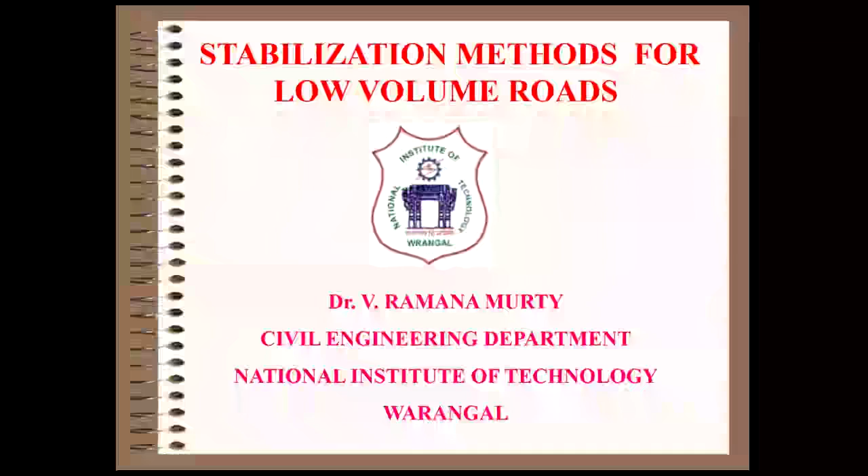This helps an engineer understand how we can handle different types of soils encountered in our engineering practice, especially for road construction. The fundamental principles of soil understanding, scientifically, were put forth by Terzaghi. This soul was selected by nature to emerge a new branch of science in civil engineering, soil mechanics. He has given all the scientific background of how to see the soil.

It is not like a lump of some mass. There is science within. What is that science? We have to see, otherwise our understanding cannot be complete. It is not only life science, but also professional science here within the ground, because Mother Earth not only serves as a mother to serve us, but also supports us by all means.

That support, while it is offering, as engineers we have to understand, so that we can comfortably transmit the loads to Mother Earth. Then only Mother will be happy, we will be happy. If there is any excess stress, then distress starts. That distress ultimately comes to the surface of the pavement, and ultimately we suffer. That is how fundamentally this understanding is essential to make our systems promising.

So let us have a recap of what we have all studied in our fundamental BTech course under soil mechanics, so that with this knowledge we will be very clear of what we are really doing. We all studied soil mechanics with this three-phase diagram in the very second chapter of the introduction. Soil has three phases: solids, water and air. As long as it is partially saturated, most soils are good for engineering works. But the moment the soil becomes saturated, that means no air phase, then problems start.

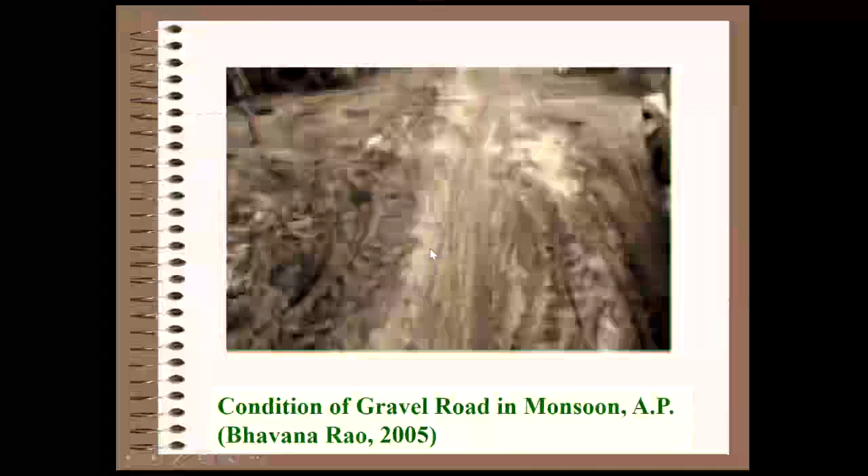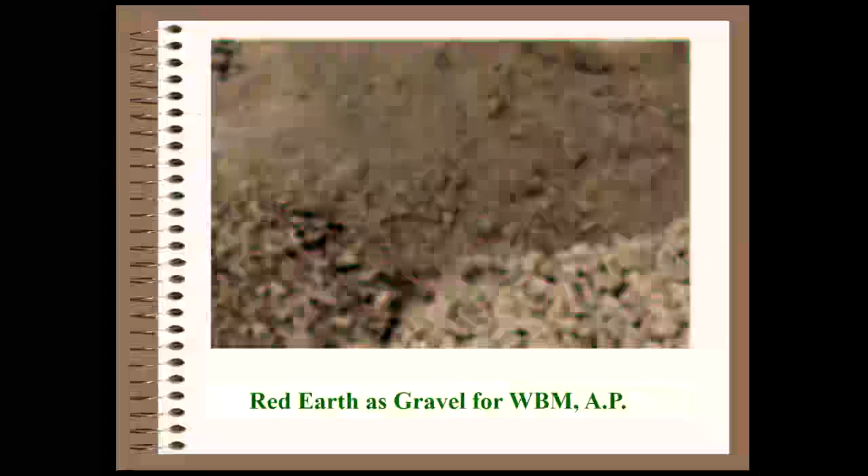So compromise in road construction does not work, because our loads are transient, with high-intensity tire pressures. And that is why an engineer dealing with foundation engineering and roads will always be confused. In foundation engineering, even when our soil is a little weak, the load applied is static, and whatever excess pore water pressure is developed, gradually it will escape under that sustained loading as per Terzaghi's consolidation theory.

What is that theory? The moment one tire pressure goes transiently within a second, the pore water pressure will be generated, and by the time the soil takes a decision to relieve or hold, it doesn't know, it gets confused because the time given is very small. The very definition of consolidation is sustained load application and gradual dissipation of pore water pressure.

Both should be there. The load applied should stand, and this pore water pressure also goes very gradually. You cannot accelerate it. That is the very definition given. Against that only our pavements work, which as an engineer we have to understand. Okay, so let us see in future slides what we can do against this type of weakness.

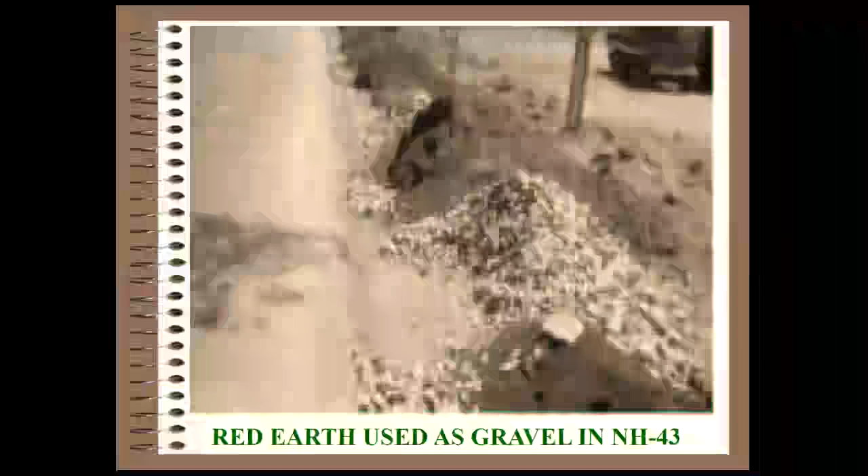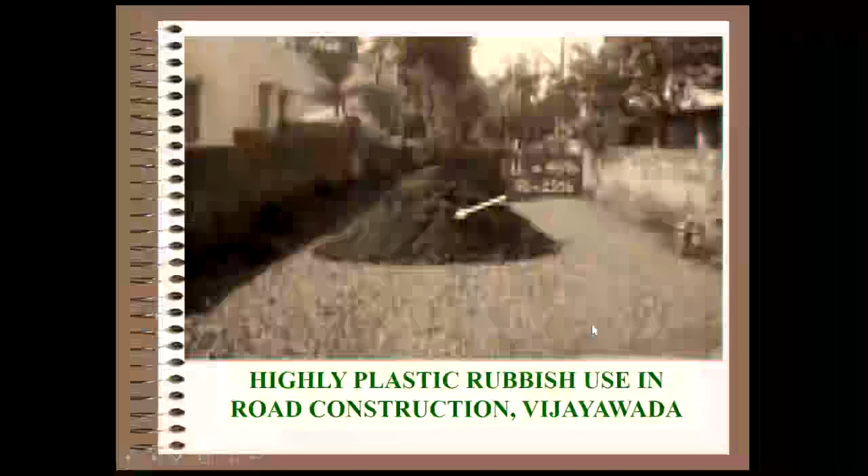So these are some of the examples of how he has presented the failures and the helpless use of these red soils for road construction, even in national highways, not to speak of rural roads. Some say highly plastic soil is being used in the construction of the road. These are all mudways, actually they are not roadways. This is what we could see in this scenario. These are some of the failures he has presented across coastal Andhra Pradesh.

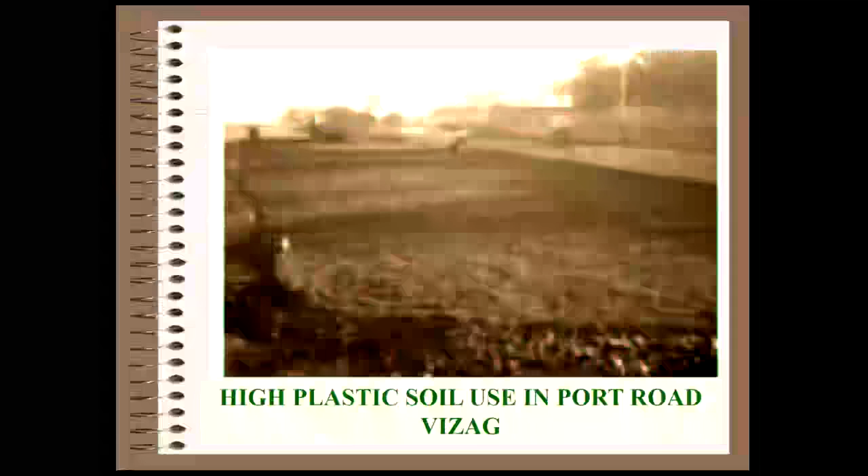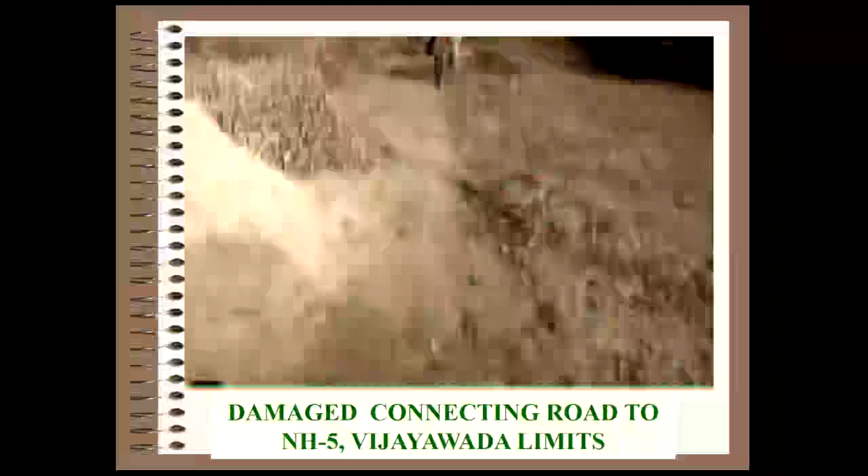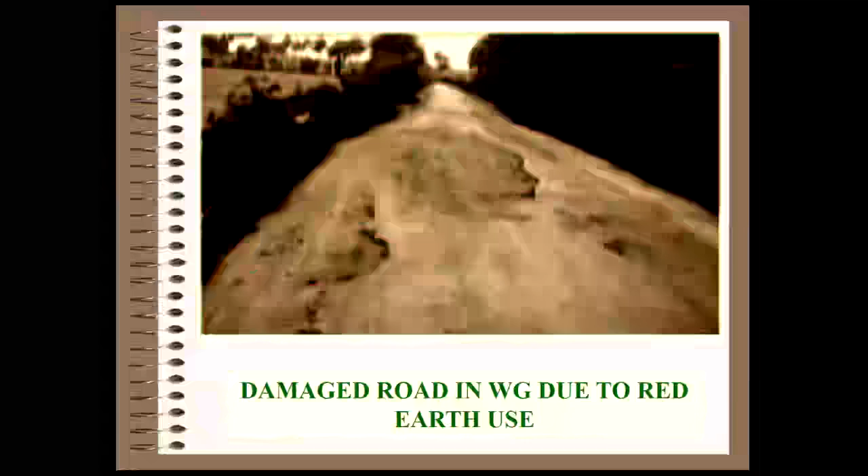Ultimately, this is how the pavement surface will be subjected to severe cracking, because underneath, once the pore water pressure develops, the system will become very weak, and ultimately under the high tire pressures, this becomes a boil and breaks the whole system, right? That is the problem here. Then of course there are some further problems. See, many roads he has presented in one of the IRC publications in 2005. Anybody can refer. Still, so many failures and explanations were given by that engineer.

And of course, crushed rock base subsequently is promoted as an alternative to these problematic local soils. However, crushed rock bases cannot be used for all roads because it is very costly, and we have to crush our natural hills and hillocks indiscriminately. Ultimately, it is not good to damage our own natural resources. At a later date, we may not see any hillocks in the localities. In fact, these geographical features are essential for the uniform distribution of rainfall. But helplessly, we are cutting the hills and hillocks around our cities, villages, everywhere because of our construction activity. So this also is not very good.

Helplessly, if at all it is essential, only then we have to do it. But even for a rural road, if we employ such techniques, though the road is promising, our environment cannot be promising. That is how we have to think. Instead, that is what I am telling, our natural soils are good, but there is a small problem. Give a tablet to that, correct it, use it. Why crush our own natural resources? This is how we have to think.

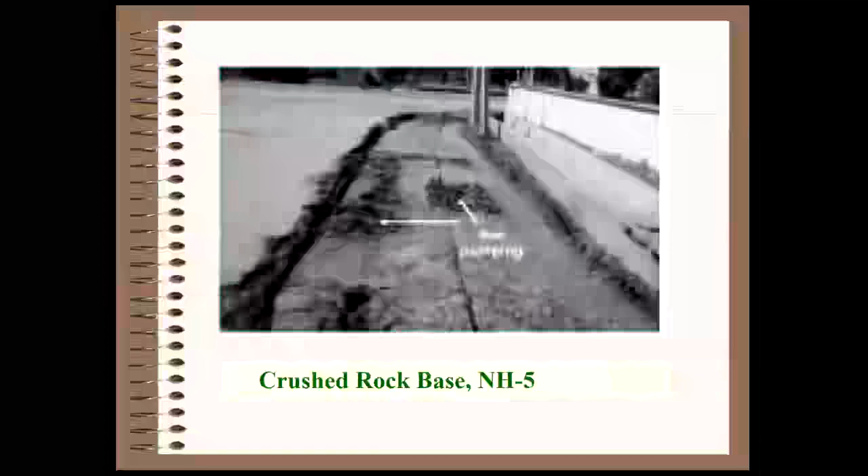The whole problem lies in these clay particles present in the soil. Of course, we should not curse this clay particle, only our life, truly speaking. Okay, a little later we will see under clay mineralogy how this clay particle really controls the whole behavior of the soil. Clays, being negatively charged, hold the water molecules like this. When water molecules are surrounding one clay particle, another clay particle is also present here with the same water molecules. Ultimately, this clay particle and that clay particle cannot communicate with each other. In between, these water molecules work like a barrier.

Water doesn't have any shear strength except the viscosity. So when there is loading or anything, it will simply slide. That is what we call plasticity in the soil. This plasticity only we have to overcome. As a road engineer, we have to be successful. How to overcome, we will see.

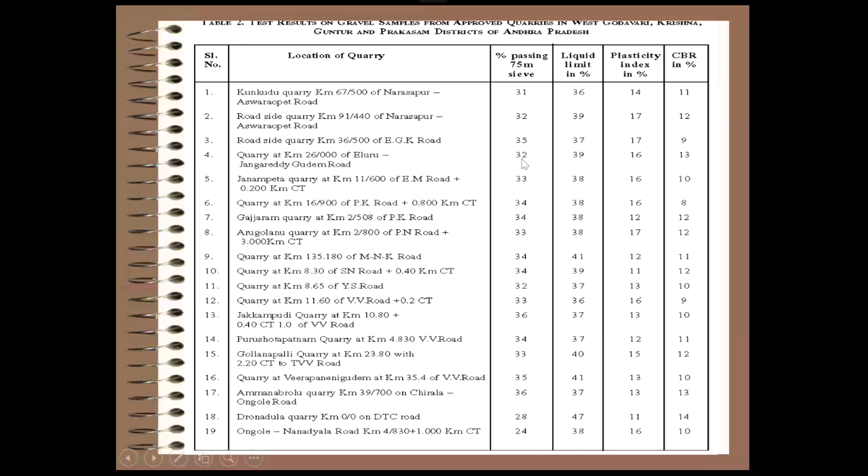See, Bhavan Rao has presented some of the research work carried out in the department laboratories by mixing sand content to the locally available quarry soils. Here, these are the natural quarry soils available in Guntur, Krishna district, Prakasam, etc. You see, none of the soils satisfy the standard guidelines given for road construction. What are those standard guidelines? The percent fines should not be more than 10%. Liquid limit should be less than 25%. Plasticity index should be less than 6%. These are some of the guidelines given. But see, none of the soils satisfy those guidelines.

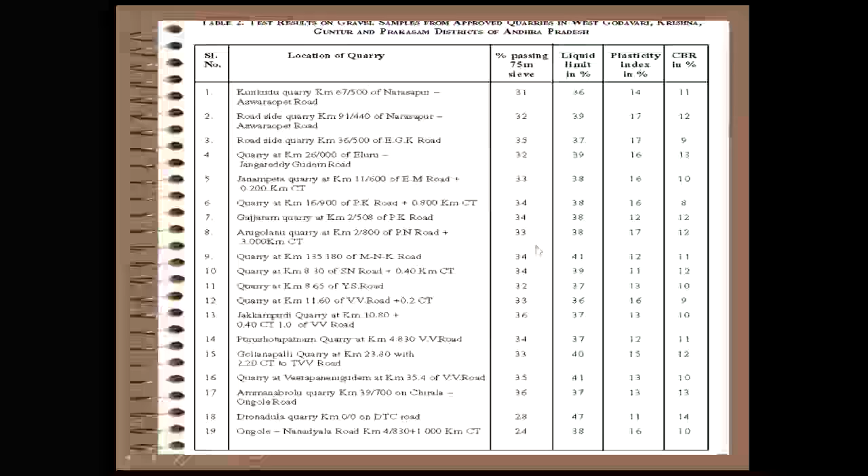So, in order to amend these soils, he has tried to mix in sand. You see here also, even when 25 to 30% sand is mixed, the finer fraction is not changed.

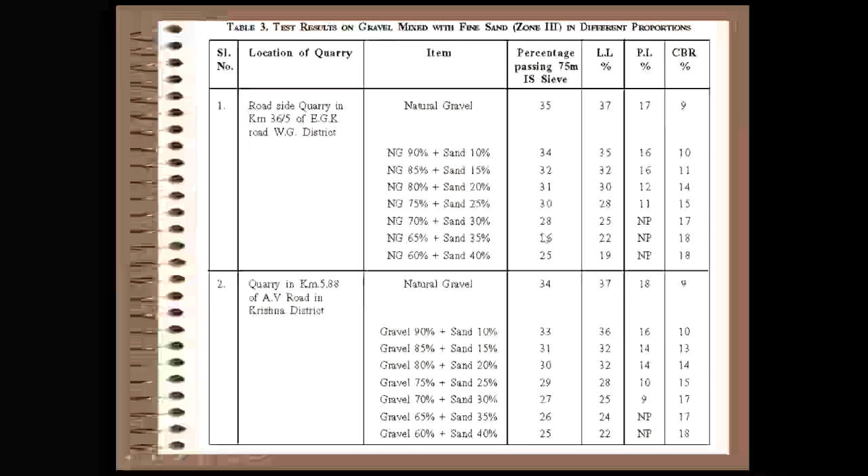Only a little liquid limit is changed. That too, here we have to be very clear. Liquid limit test we will do on minus 425 micron size. That means the sand being added must pass through 425 micron sieve. Otherwise also it doesn't have any influence on the plasticity properties.

Okay, so normally these natural soils also will contain sand particles. Some 60-70% at least they will have, as per the table also. You see, the percent finer fraction is about 30-34, means the remaining is mostly sand, gravel. Even for that, if we add the similar size of sand grains of that sand size, then the original finer fraction present still cannot be diluted and it cannot decrease the plasticity. That much understanding we should have, not blindly adding some sand, the soil will be amended. It is not possible.

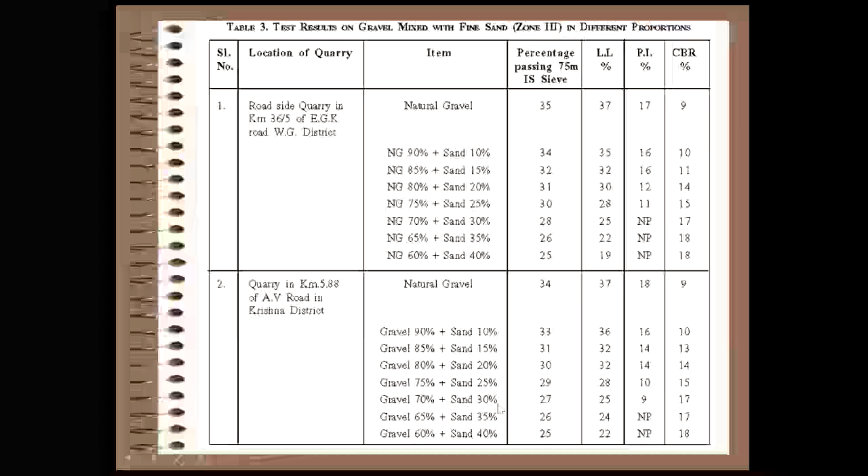So that is how here, when he has presented, even with up to 30%, still the problem is persisting. So ultimately, the literature on stabilization, we all read in our books or even our manuals like this. General soils based on the particle size will be gravel, sand, silt and clay. And all these fractions have their own distinctions in their behavior. Gravel by itself is good. Sand also good by itself. It does not have any plasticity. So its problem is binding. Somebody should hold it. That is the only requirement when we are dealing with sand and gravel.

Here, silt and clay. Silt and clay, because of their small particle size, you see, microns. We are speaking microns, 2 microns, 75, less than 75 microns. Because of their small particle size, their surface area will be very high. And especially though silt by itself is a silent particle, clay is not a silent particle. It is a very active particle. Even when 10% clay fraction of Montmorillonite nature is present, it can control all other fractions. You see, the subtler and subtler the force, the more powerful it is. This is the philosophy. Subtle forces are powerful.

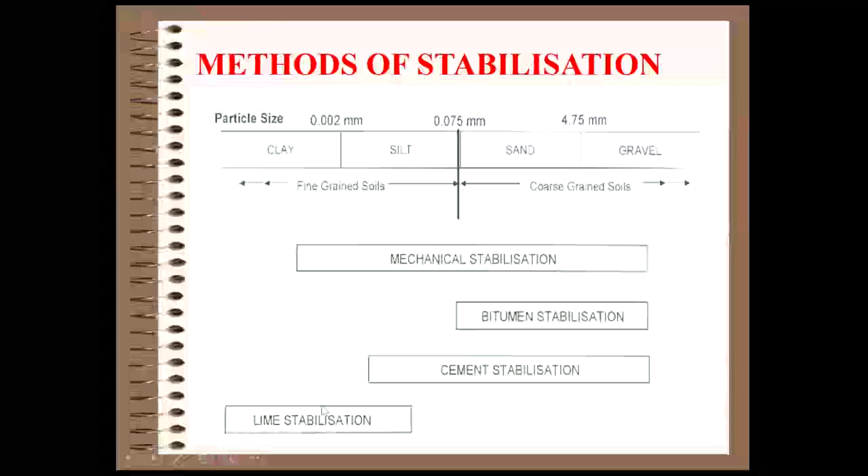But on this side, the problem is not only amendment but also mixing. Mixing the stabilizers with the fine-grained soils is not easy. Little later we will see how difficult it is. So here, that is why our approach should be scientific. How best we can handle both the problems, mixing as well as the effectiveness. To that extent, the developments are like this. Mostly for fine-grained soils, lime stabilization is suggested. And in case the lime stabilization is inadequate to give the required properties, cement stabilization also will be supplemented along with the lime stabilization. We will see little later, this is two-stage stabilization when it will be done.

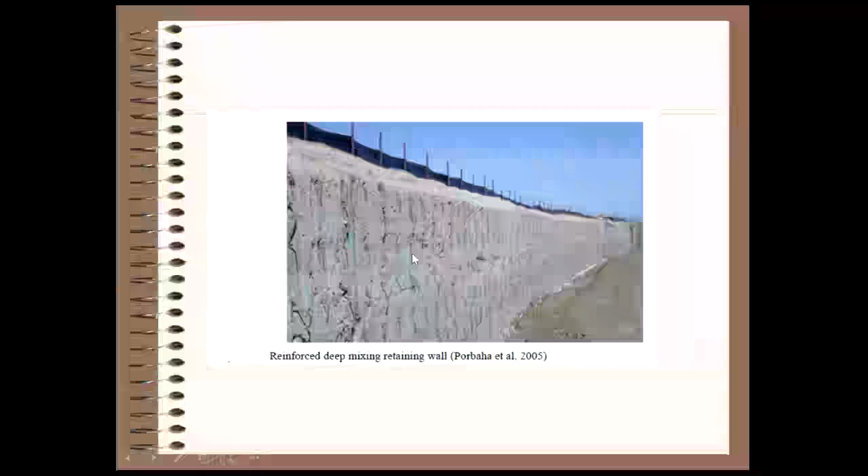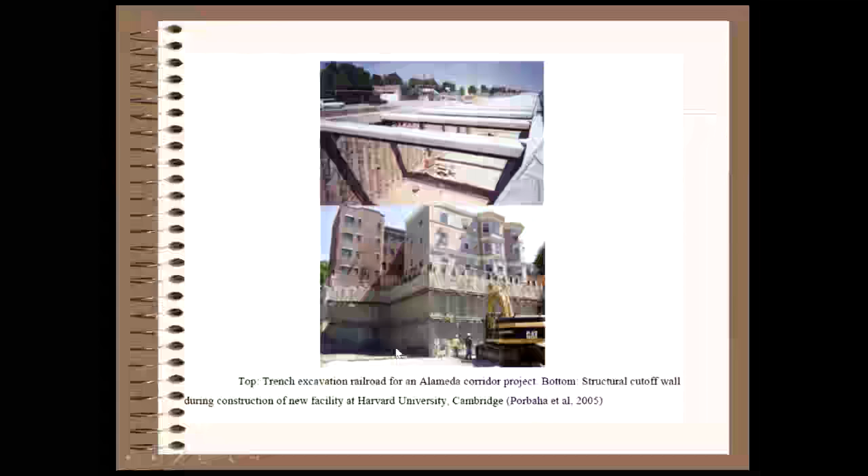See how across the world this soil stabilization is working. It is all some deep mixing using the lime to form this type of vertical wall, you see. Otherwise we will normally construct a concrete or masonry retaining wall. Instead, it is all only deep mixed soil column, soil plus lime or soil plus cement. They will mix like this. Then after setting, it is becoming like a wall, right? So this is the technology working. That means the stabilized soil is able to stand like this. Why don't we use these type of ideas? You see, even vertical cuts with this much load, after the installation of the stabilized soil columns, they are standing. That means stabilized soil is very good by itself. Similar advancements we can make in our road engineering also to make our roads promising with simple amendment.

And in this direction, the different approaches, see, normally mechanical stabilization, then admixture stabilization will be predominantly used. Mechanical stabilization means, see, a particular soil may not be able to satisfy the required gradation and plasticity. Okay, then try to mix some other better soil so that we can amend this soil. By mixing 2 or 3 locally available soils, if we can get close to the specifications, that is also good. Now let us see what the code suggested. Soil plus some aggregate mixes were suggested like this for the sub-base and base courses. These are some of the gradations suggested, but here you see the guideline. Minus 425 micron size should be just 15% around average. And this is again stringent.

75 micron fines should be very less, 4 to 8, and here at the most. That is why I make a general statement less than 10 here or here, something like that. So finding this type of very good soils having percent fines less than 10% is very difficult at several project sites. It must be a desert-like soil.

Okay, Mother India is not a desert. That is why only we are fortunate to get our food and juice. So to that extent only we have to amend these soils so that we can address this one problem. Until we address this last line, our success cannot be there, because that will control all other gradation.

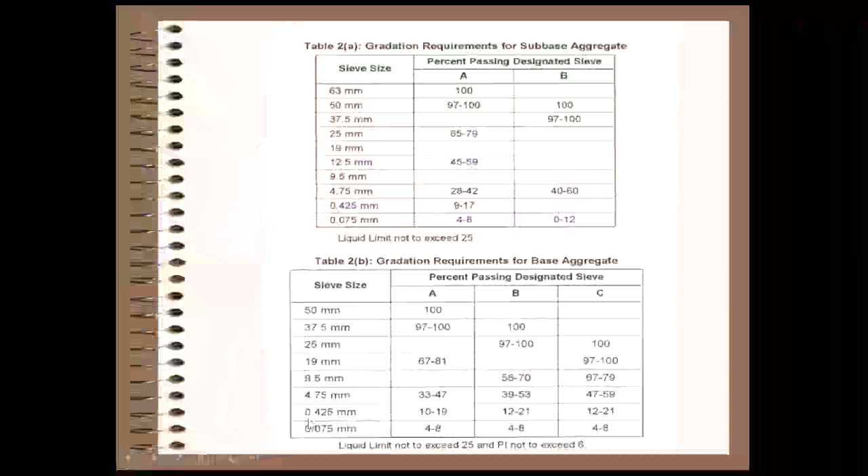Okay, so that is why here you see below this table, liquid limit not to exceed 25%. Here also liquid limit not to exceed 25 and plastic index not to exceed 6%. That means these guidelines are very stringent. Very rarely we will satisfy these two guidelines.

Most of the Indian soils, even if they are good, okay, Telangana Moram type soils, some pockets, the liquid limit will not be there. They are non-plastic. But otherwise, even Moram soils also predominantly will have the liquid limit between 30 to 40. And I have seen Moram soils having liquid limit even 62%. We'll see little later what we have done with that type of soils.

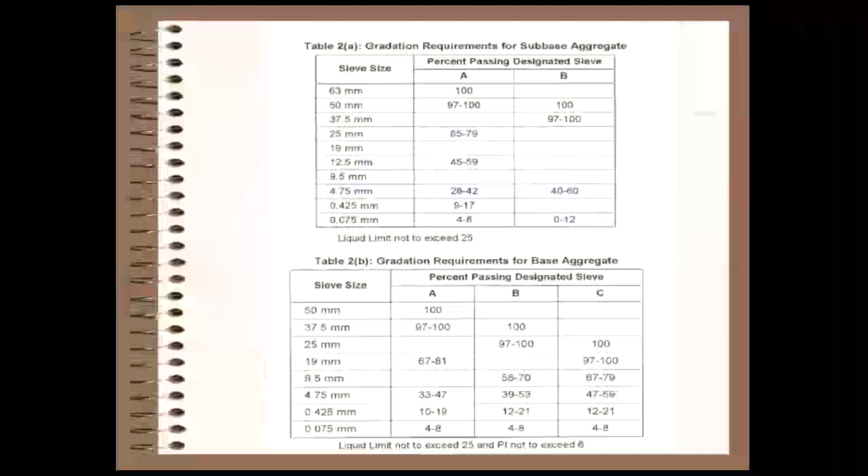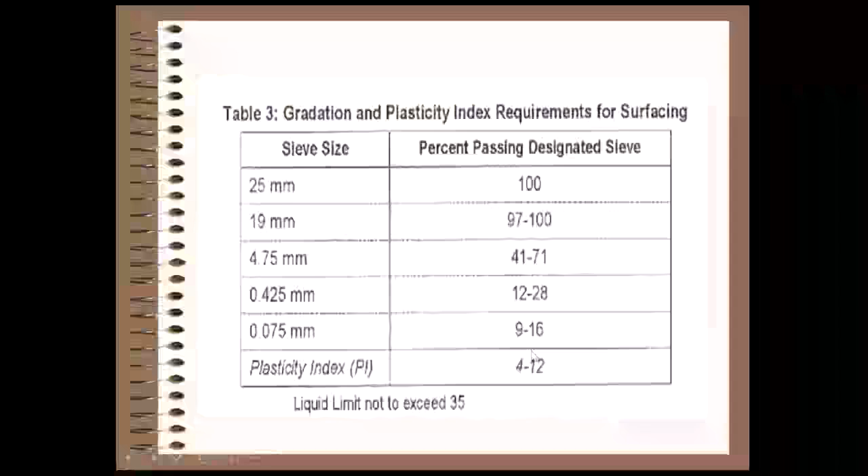Yeah, and these are the requirements for the surface layer. The liquid limit is allowed up to 35%, because at the top it should be little smooth. And of course here the percent fines are limited to only around 15%. So these are very difficult to be satisfied. That is the whole problem. Writing the guidelines is okay, but in reality, we may not realize this type of stringent guidelines with natural soils.

And other amendments suggested sand clay mixes for different types of soils. See, if at all only clay is there, add some sand. If only sand or gravel is present, add some other clay type soil, so that we can use them in the road construction. This is what this amendment, sand clay mixes.

Then here, clayey soil for sands and gravels. That means sands and gravels are available, but only sand and gravel cannot be used because there is no binding. They can simply erode under the flow, and the confinement is required. No? That is why somebody has to hold these particles. Then some clay content is to be added. That is suggested to be around 10 to 35%.

Sand for silty soil, only silts are not at all suggested for any engineering use. This is the general truth. We study in soil mechanics. Silty soils cannot be directly used for any engineering works because they are prone to be eroded easily, scoured. Then some sand must be added, means that sand 15 to 30% is suggested for the silty soils to amend themselves mechanically.

Only black cotton soil is present, for example, then to amend it, 40 to 60% sand is suggested to be added. But you see, where is sand now? Can we really use these ideas? Very difficult. Sand has become gold now. So because of this type of ideas, though they are all given in our codes and manuals, in practice we cannot follow these guidelines. And moreover, see the stringent guideline here, liquid limit should be less than 25, plastic index should be less than 6, minimum CBR 20%.

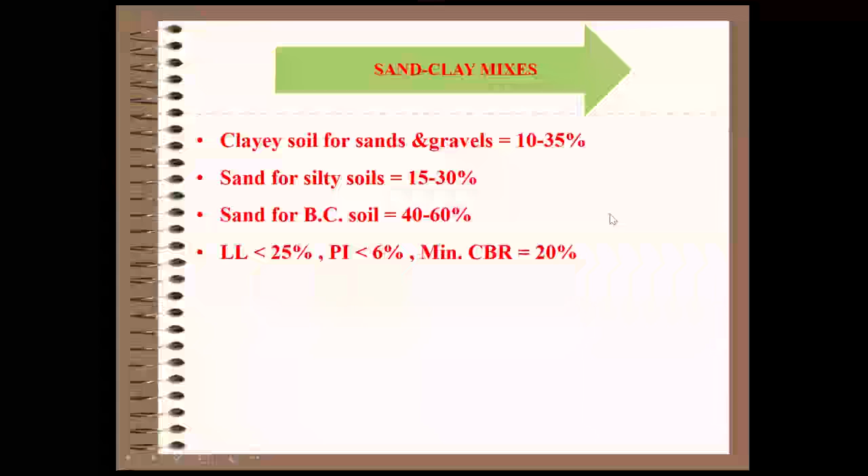Then normally in Telangana, Moram soils are predominantly available. Just now, as I was telling, Moram soils by themselves are good, 80% sand, gravel, etc. But the remaining 20% is again fine grain fraction, silt plus clay. Liquid limit will always be more than 30%. That is enough to damage the properties of Moram soils. That is why most of the Moram soils, though they are generally considered to be good, the CBR value will be less than 5 only.

Right? So then people think sand can be mixed with that Moram soil to amend it. As I said, sand availability itself is a big problem. And what type of sand are we getting? Because I told you, within this itself 80% sand is there already. Adding the same size of sand is of no use. Minus 425 micron size sand, whether it is available or not, we do not know. So with this many constraints, satisfying the material specifications using mechanical stabilization alone is in practice really difficult.

And here is some more suggestion. Okay, your soil is not very good, then add about 30% aggregate to that soil. But again, in this guideline you see, plasticity index should be 8 to 11% and sand must be greater than 33% within this soil. This again is a very stringent guideline, not easy to satisfy.

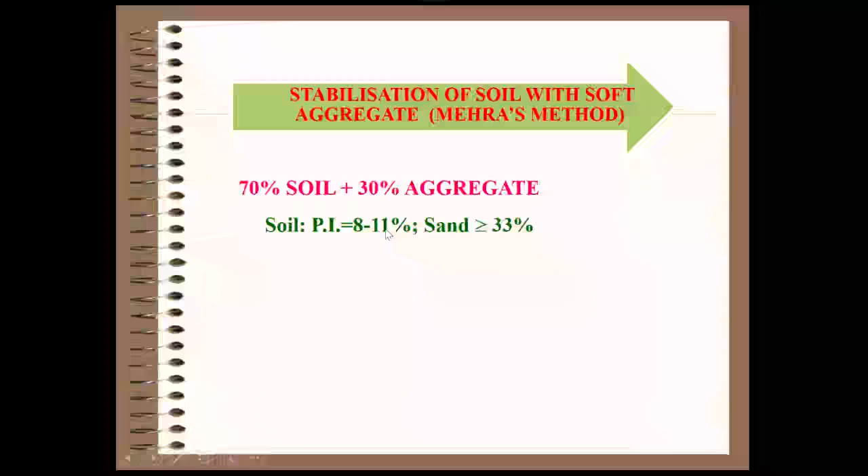See, ultimately this soil property only will control. Please understand, adding this aggregate does not change the original plasticity property. Originally this soil should have this low plasticity index, meaning that the soil must be good by itself. Such good soil is not available, not to speak of our trial with this aggregate. This is the very root problem one has to understand, especially with respect to our Indian soil conditions.

Then lime stabilization, this is again admixture stabilization. That is what we have seen under the table. Mechanical stabilization means amendment of the gradation and plasticity by admixing different types of materials, aggregates, soils, etc., so that we may get the required gradation and plasticity. But however, as I have already said, it is not very easy to satisfy these specifications in reality. Now, this is stabilization, that means admixture modification, whether lime, cement, all these materials come under admixture stabilization.

So, lime stabilization is normally suitable for clay soils. One has to be very clear at this point, lime by itself is not a complete binding material. Only hydraulic lime is a complete binding material. We have studied different types of limes in our building materials. Hydraulic lime consists of about 30% clay. That is why it has cementitious properties. That is why it is called natural cement. All other limes cannot act like binding materials except for a little carbonation.

For such limes, if at all we have to forcibly use limes which do not have any cementation by themselves, then we have to induce the cementation by additional support. That additional support comes like this. For example, quicklime you have added to the soil is by itself not a binding material. But however, quicklime changes the pH value of the soil. Once the pH value becomes more than 12, then the clay particles will respond to that alkaline environment. Alkaline environment is aggressive for the clay particles. Under that high alkalinity, the clay particles gradually lose the silica and alumina from the central mineral structure. The moment silica and alumina come out of the mineral, the calcium Ca is already waiting for those ions. Then calcium silicates and calcium aluminosilicates will be formed. That is how cementation will be induced.

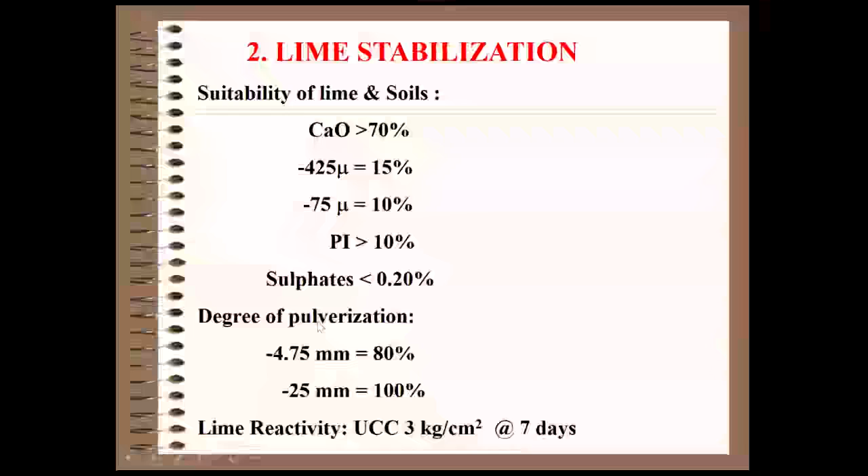Of course, if it is non-plastic, we need not stabilize also. We have to go for another method of cementation in case it is required. Otherwise, by themselves, if they are good, they are good. Morams, etc., by themselves, are good. However, if plasticity is present more than the requirement, then we have to amend it. That is why the suggestion is made. Clay or BC soils, 3 to 5% lime is generally sufficient. Highly expansive clay, then 5 to 6% is suggested.

Again, you see, these are mostly to address the plasticity problems. But then the other requirement is CBR; sometimes a 20 to 30% CBR value we should get after the amendment. This is another problem. Most of the time we may not get this, for which a little higher lime content is required. Because initially some 3 to 4% lime will be consumed by the soils to address their own plasticity. Only when the plasticity is overcome will strength come. CBR is a strength index. Strength comes only when plasticity is overcome. That much clarity we should have. Both do not go side by side. If more plasticity is there and you say there is a lot of strength, nobody will believe.

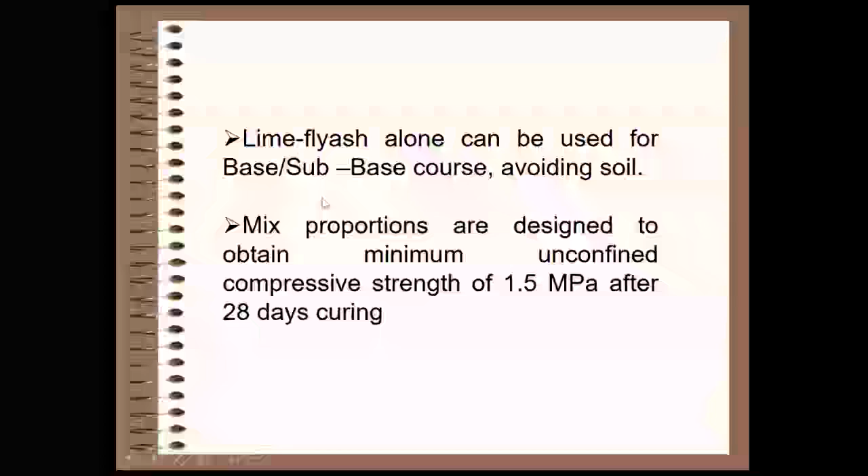And of course, if fly ash alone is available at the site, the code again suggests fly ash and lime itself can be used. Okay, it becomes hard actually. Fly ash lime stabilization, if it is reactive, becomes hard. Then that can be used for the subbase and base courses, avoiding soil altogether. Then of course, to do this, the guideline you see here, we have to check; we should not go blindly for anything. 15 kg per square centimeter, or 1.5 MPa, unconfined compressive strength we should get at a 28 day curing period between the lime and fly ash. Only then we can go for this type of application.

Then for the fly ashes, we all studied class F, class C. Class F means siliceous fly ash, where the silica content is more than 70%. By itself, the lime content is less. Otherwise, it will have some pozzolanic reactivity. That is the meaning of siliceous fly ash.

Calcareous fly ash by itself contains sufficient lime content, calcium oxide, generally more than 10%, and the silica content must be 50%. This is how these fly ashes are categorized under Indian conditions. Class F and Class C means only this. The siliceous fly ash is represented by F, calcium oxide less than 10%, calcareous fly ash represented as C, calcium oxide greater than 10%.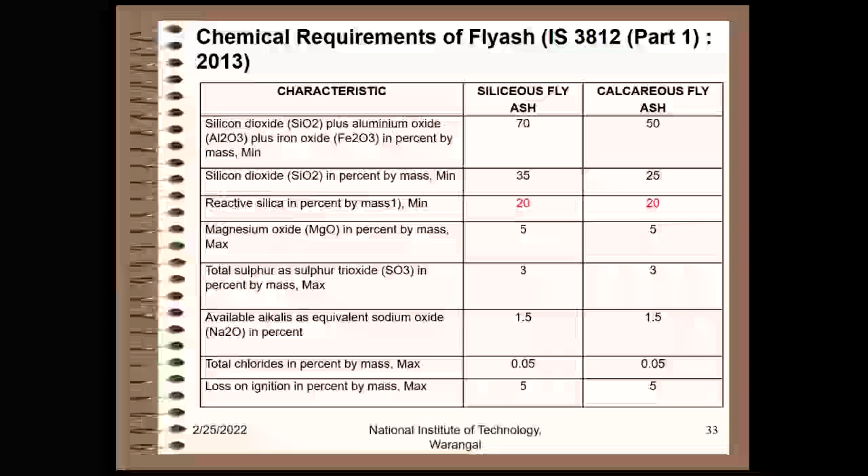And it is not enough to see the total silica content, but how much of it is really useful is important. That usefulness comes only when it is reactive. Silent silica is of little use for the stabilization, because I have already told lime by itself is not a full-fledged binding material, it depends on other materials for their contribution to get the binding. That contribution comes from the other materials. For example, here we are depending on fly ash. In that, the reactive silica must be present, not the total silica. 20% must be there if at all we depend on fly ash for inducement of the cementation in the soil.

Then these are some of the reactions possible between the soil and lime. Immediately when quicklime type lime is added to the soil, hydration, flocculation, cementation, carbonation, these are all some of the short-term reactions. Hydration means the quicklime gets the water from the soil and makes the soil a little dry instantly, and that is how it becomes workable.

Flocculation happens because, see, it is like our sedimentation of drinking water using alum. Here also a similar condition will be prevailing. Once the lime is added, calcium ions are present. These calcium ions sit on the clay particle surfaces so that the negative charge will be satisfied. Once the negative charge is satisfied, the clay particle becomes a little convenient and happy, and when it is happy, it can do friendship with the surrounding clay particles, and when more clay particles are under friendship, they will make flocs. When such flocs are formed, the surface area will be reduced and water affinity will be reduced. The material becomes workable. A little later under clay mineralogy also we will see similar concepts.

Of course, these are all very quick reactions. Within 1-2 days it will happen. Cementation, of course, is not that immediate. It takes time. Generally, the code says if everything is maintained, that means sufficient moisture content, temperature, everything, up to 28 days curing period is required to get the cementation. This is the long-term reaction. These are the short-term reactions.

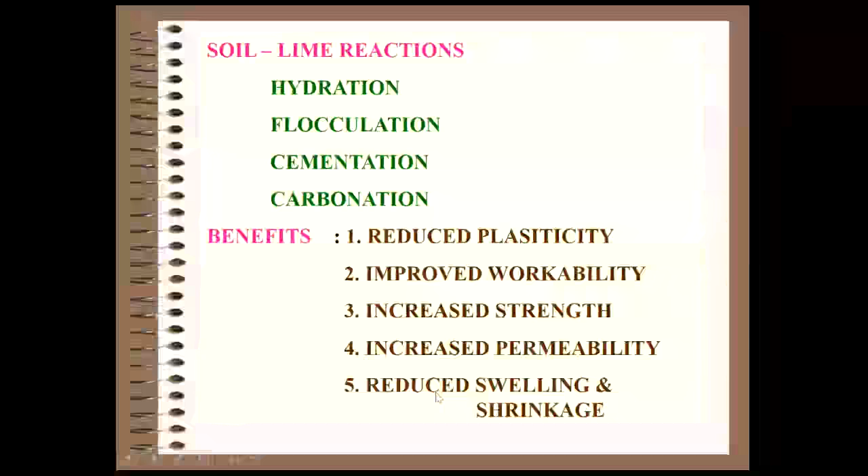Then of course if it is swelling type soil, those properties also will be modified by the lime stabilization. That is why for black cotton soils we suggest the lime stabilization. These are all some of the changes that happen when lime is added. Liquid limit is decreased a little and plastic limit will be increased. The net effect will be reduction in the plasticity index. Once this plasticity index is decreased, then soil will become a little friable, workable, easy to work. Otherwise it will stick to the rollers, everything.

Nobody can actually work with this type of clay. That is why lime at least facilitates the material not to give such working troubles in the field. Another important point to remember: when lime stabilization is done, the density will be slightly decreased, because lime by itself has a specific gravity less than soil, and it is a very fine powder that we are adding. That is why the density will be slightly decreased.

However, we have to remember that this slight reduction in density, the subsequent strength loss, will be restored by cementation reactions. So it is not really a loss. A little compromise in the density, but ultimately we will get more strength only because of these reactions.

And one more precaution: in case of cement stabilization, with increasing cement content, the strength keeps on increasing. However, in case of lime, this much clarity must be there. Up to a certain extent only it will increase, and beyond that it will fall down. So that is why we should not add lime in excess of the requirement. In that case, lime will remain as free lime, that means free lime particles.

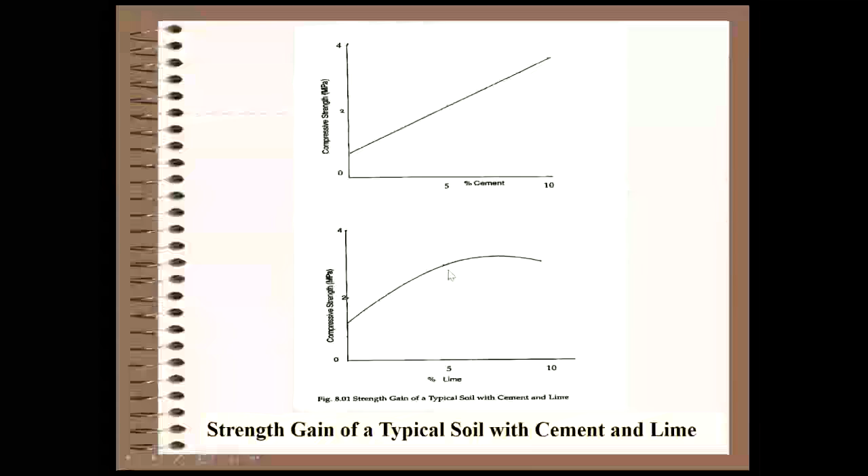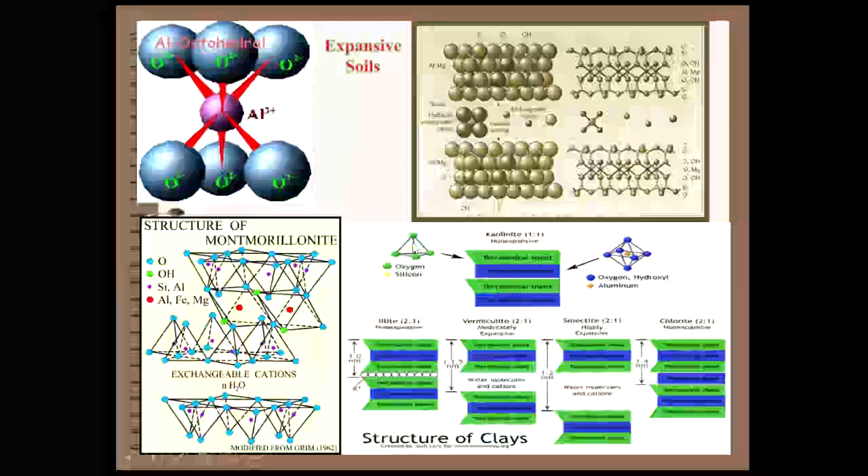That is why we are adding lime stabilization now, because lime, being a divalent cation, can pacify the negative charge significantly so that the material will remain silent, and so that we can design our structures a little happier. This is the entire philosophy of our lime stabilization or cement stabilization. Ultimately, our success lies in silencing these central clay minerals.

Then we have taken up a little work at NIT Warangal to understand how. Ultimately, reading alone is not sufficient. As a professional, we have to have some hands-on experience. Otherwise, you will never become confident of any idea or engineering. That is why we have taken up some little research work at NIT through our MTech project works.

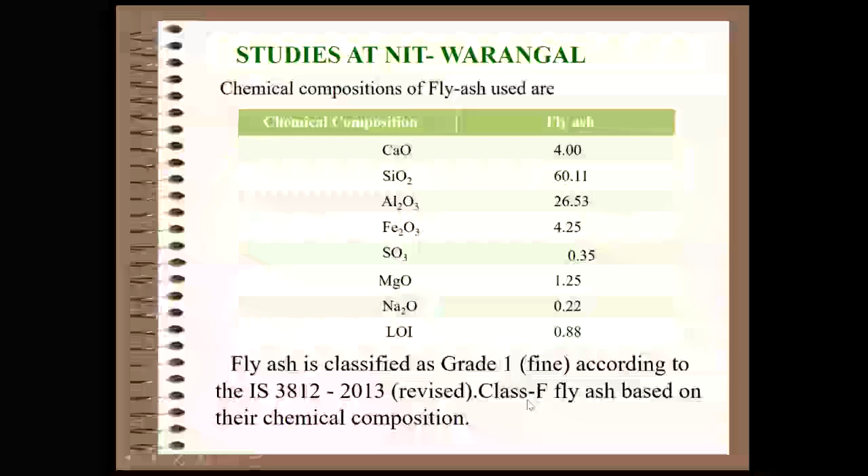Chemical components, again GGBS, ground granulated blast furnace slag, also we used for our study. Actually this GGBS is very promising compared to fly ash based on our observation, because here the calcium content you see more than 30% and silica is sufficiently there. That is why sometimes GGBS by itself is becoming very hard, even little content.

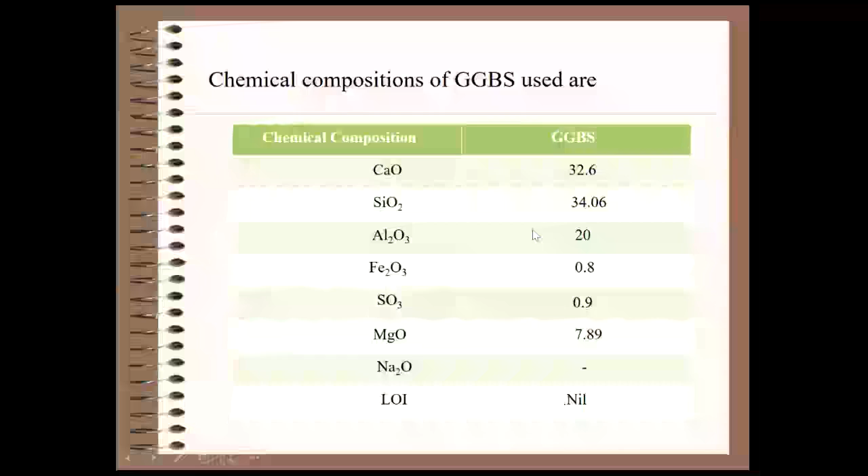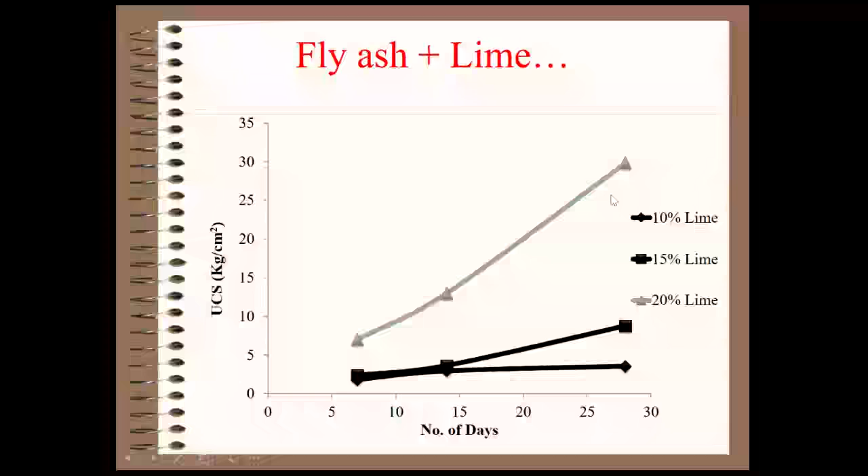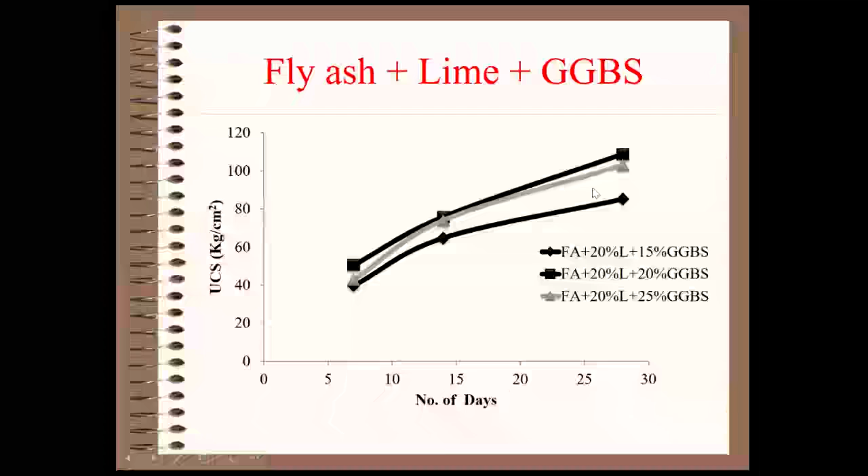With only fly ash, it is only about 30. So the GGBS found to be very effective in giving the strength. Cement, of course, works well with any material because by itself is a complete binding material. Then these are some of the ideas what we got.

And for our road engineering, see the IRC suggests 45 to 70 kg per centimeter square between 7 days to 28 days curing period. For that also, our experimental results for different combinations at different curing periods, we got the unconfined compressive strength within this range, and the percent weight loss, etc., were again satisfied. That is why successful combinations only I have presented here.

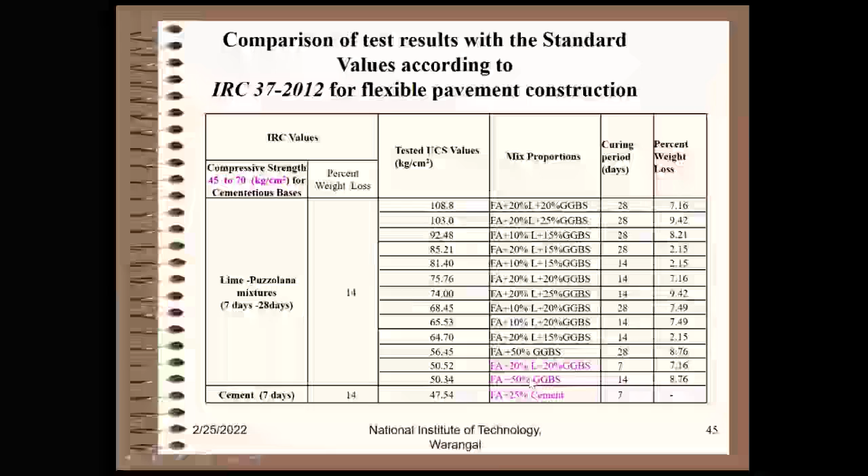Interestingly, you see, fly ash and GGBS alone also is able to give the strength, sufficient strength. Okay, cement even not added, lime not added also is becoming strong, because GGBS by itself is having lime content sufficiently. Even 25% cement is not able to do the job what this fly ash and GGBS could do. You see, this is a beautiful observation.

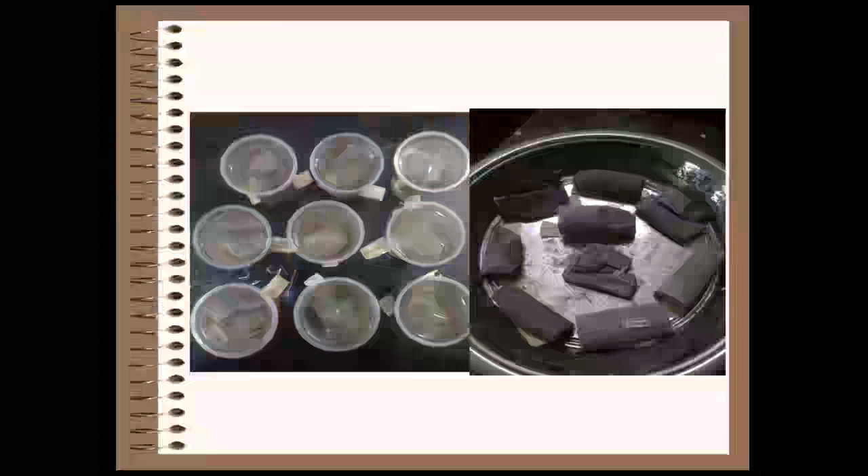See, normally in civil engineering, we should not believe any of this type of results unless ultimately the material is tested like this. When they are dry, everything is good. When they are fully saturated, then only in civil engineering all the problem starts. That is why our testing should end with the saturation condition only. That is why CBR soaked condition we will test.

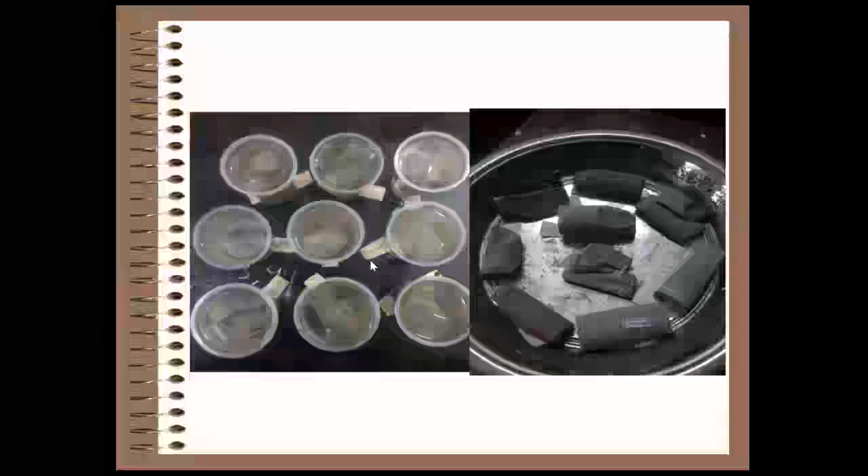Here also, at the end of the test, just I have put most of the samples in water to check whether there is any possibility for disintegration or not. Okay, they're all standing means by themselves are okay now. That means the results we can believe.

Then cement stabilization, types of soil. See, in cement stabilization, as I have already said, cement by itself is full binding material, complete. So here cement again must be judiciously used. We should not go blindly. See, long back during 1930s itself in Britain, they have used this cement stabilization for the road constructions. Then the Britishers have categorized the soil cement mixes like this very scientifically.

Do you want more strength? Okay, then go for this 5 to 14% cement content. Use that mix for base and sub-base courses. In case you are using for some erosion control work, slope protection, okay, use the same cement content, but add more water to get the mortar consistency. That is what I suggested. Here, this line is very suitable for road engineer.

Modified soil cement. Here, the suggestion is the cement content is only less than 5%. Generally, this can be used for subgrade. Original subgrade itself is not good. Now, the stringent guidelines are CBR must be greater than 5, and for higher roads greater than 8. All those guidelines have come. But many subgrade soils are not satisfying that guideline. In that case, less than 5% cement we can use to modify this subgrade soil itself to get the minimum CBR required. Okay then, so CBR can be greater than 25%, making the material suitable for sub-base or base courses.

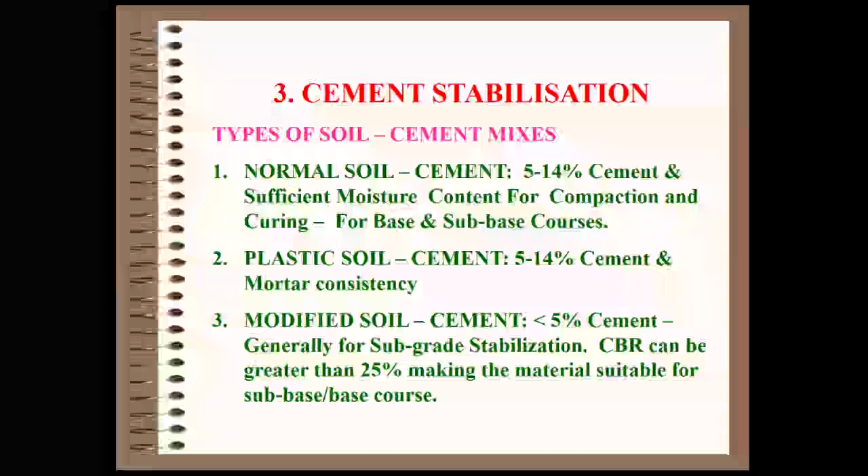Then of course the guidelines again from our own manual, it is given how the gradation of the material for this soil cement stabilization is to be used. More favorable gradation is given here. And here also the same problem. The degree of pulverization

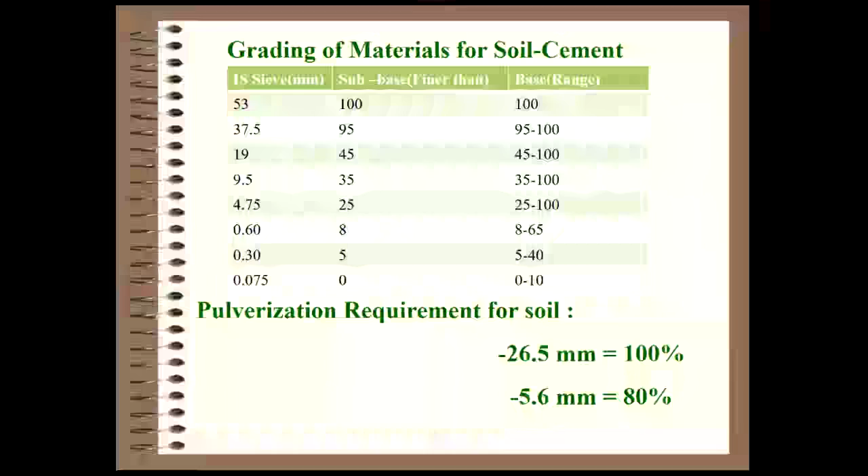80% will be less than about 5.6 mm, and all the soil must pass through 26.5 mm. That means pulverization is not that easy, especially with the clay soils to this degree. A little later, we also face the same problem. I will just show some figure.

Again, suitability. Just now I was telling, cement being a little costly material, one should not attempt it for all soils. It is a precious material, you see. It is used in concrete and other higher end products, but we are using it with soil because of our difficulty. So we must be a little cautious where to use, where not to use. For that, the guidelines are given.

You see here, a useful rule for soil selection for the cement stabilization is plasticity modulus. Plasticity modulus is the product of plasticity index and the fraction passing through the 425 micron sieve. It should be less than 250, and the uniformity coefficient Cu, which in our sieve analysis we will come across, D60 by D10, should be greater than 5. This is how the guideline is given. For such soil, cement stabilization can be favorably used. And of course, sulfate content should not be more than this.

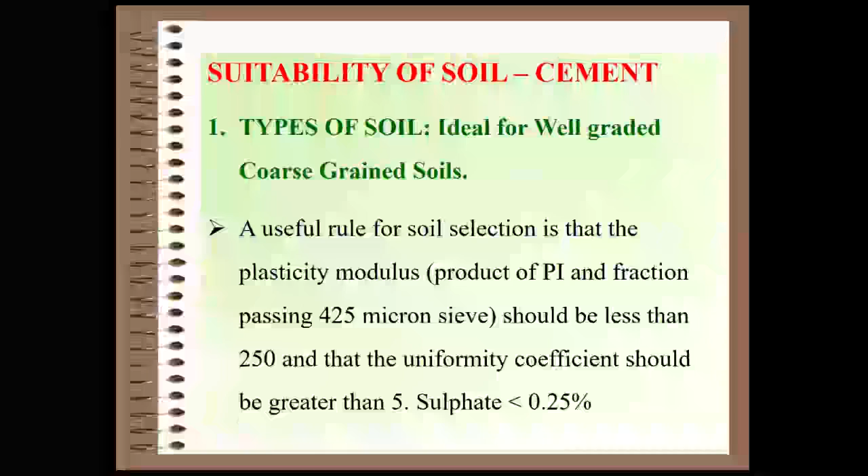As for the lime content, as in lime stabilization, here also the same problem will be there, because during the hydration of the cement, again free lime will be liberated. And in case the sulfates are present, ettringite will be formed. Once ettringite is formed, the swelling starts. Another problem. Unnecessarily we induce the swelling. It may not be originally black cotton soil, but the similar problem we unnecessarily induce in the presence of sulfates. These are some of the other guidelines.

More water should not be used; water cement ratio, everything, quality of water, all that we studied in our concrete technology, is also true here. Because here also the same cement is acting. That means if organic matter, etc., is present in the water, that damages the cementing property of the cement. So again, the water cement ratio law, Abrams' law, is still true even with soil stabilization, not only in concrete technology. Same points are mentioned here.

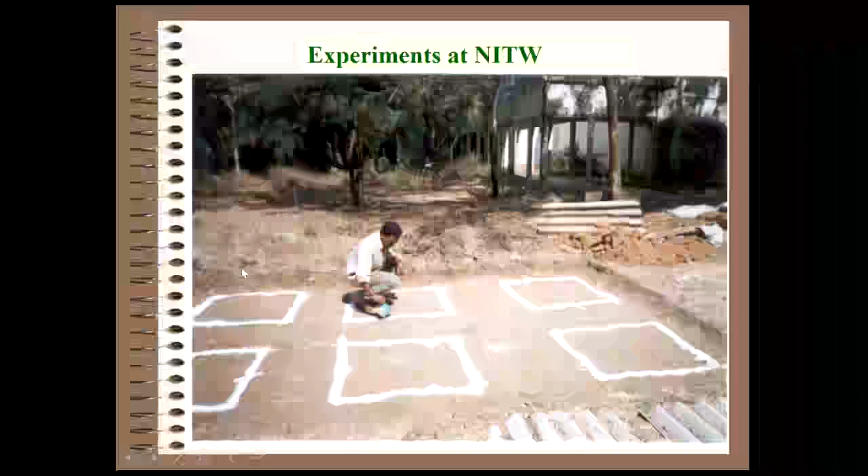Benefits are similar to the lime stabilization only. These are all not very different from the lime stabilization. And some small study we have made here. That small study, what we have done is, you see,

here in Telangana, all the Murrum soils are not the same. And to represent the widely ranging properties of Murrum soils, we collected 3 Murrum soils from different quarries, having different plasticity and finer fraction. And for all of them, we have used on one side some 6% cement stabilization, and on the other side, naturally, in whatever form they are available, we used just what we can helplessly do in our field.

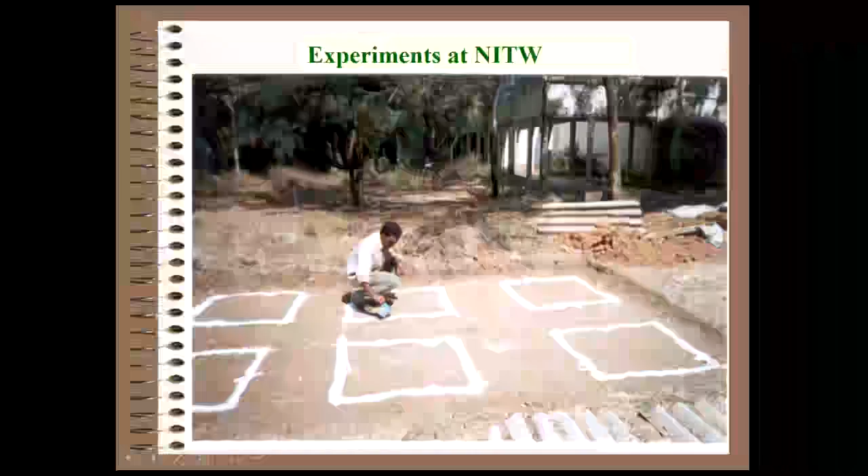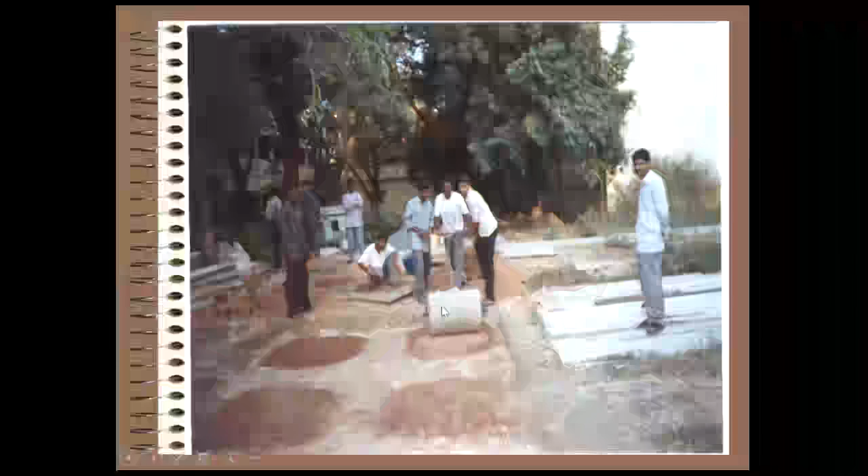So grade 2 metal is used to construct these stretches. All this is only gradation. Then these small stretches were constructed. As I told you, one side 6% cement is added to all the different types of murrums, other side no stabilization. Like this, now ready, cemented and non-cemented.

You see, after the setting time, we also measured the Young's modulus and instant CBR. This is a Loadman test to give the Young's modulus, and also clegg impact. This gives the instant CBR value. Then also rain simulation we carried out using a shower. The shower we have used just to simulate the rainfall.

Within 10 minutes, see how the aggregate is ravelled, all the material is washed out. This is what is a reality in the field. If at all unscientifically, without any blacktop, if we believe only earth roads will stand, this is how every monsoon our roads will be damaged. This 6% cement stabilized system, they are intact, no loss.

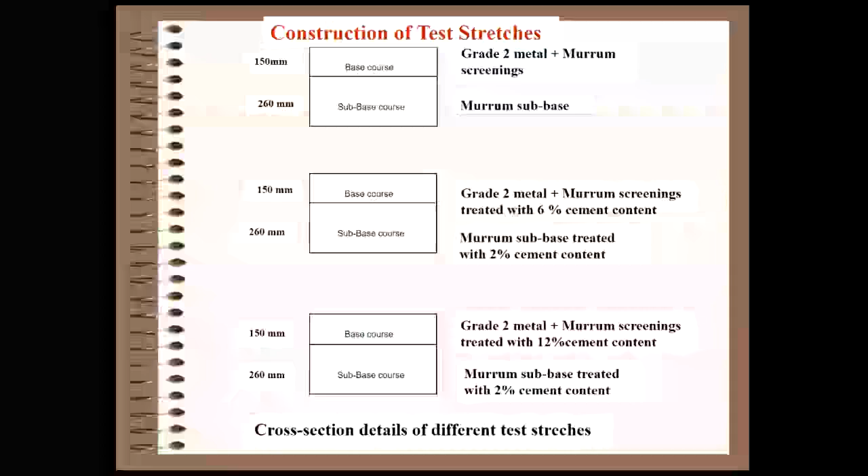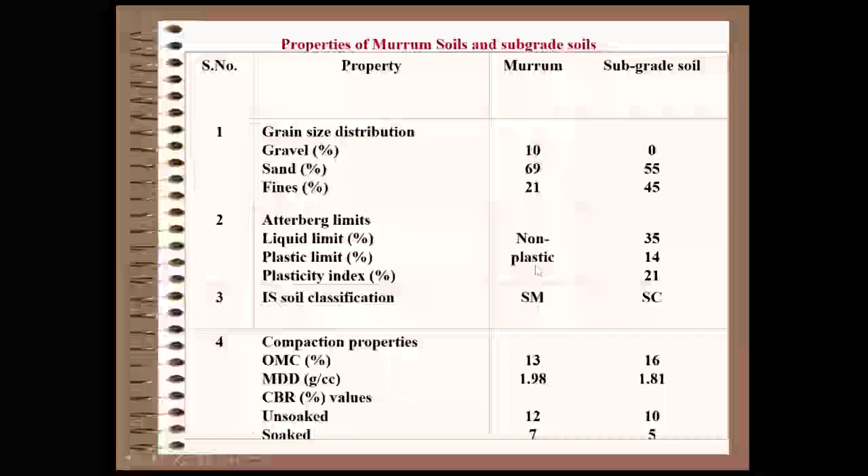And based on that, we further extended our study to understand further, can we really go for murrums like concrete roads, cement stabilized murrum roads as concrete roads in that direction? Because most of the Telangana murrums by themselves are good, I have already told. The 80% is sand and gravel only, but that 20% if we can amend, it is looking like concrete only. So why don't we extend the study to that? So for that, one murrum soil having this percent fines like this and subgrade, and ultimately we have got these properties for this part of the study, and these stretches were constructed like this.

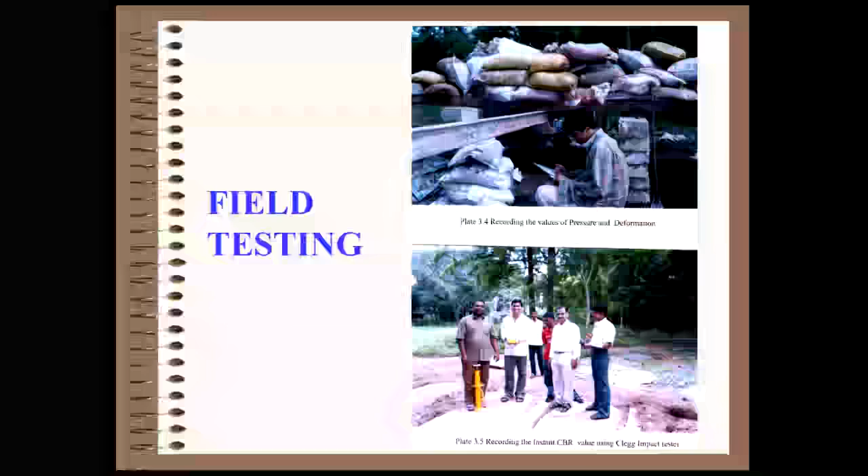Here what we have done is, without stabilization, with 6% stabilization cement and again 12% cement, because my idea is, can we go for murrum stabilized rural roads, something like that, like concrete pavements. Generally 10 to 12% cement is a minimum requirement, otherwise that much strength we do not get and durability. That is why we fixed 12% cement. And later conducted the cyclic plate load test on these stretches, and also Clegg impact and Loadman test. As we have these gadgets, we captured the Young's modulus and the instant CBR.

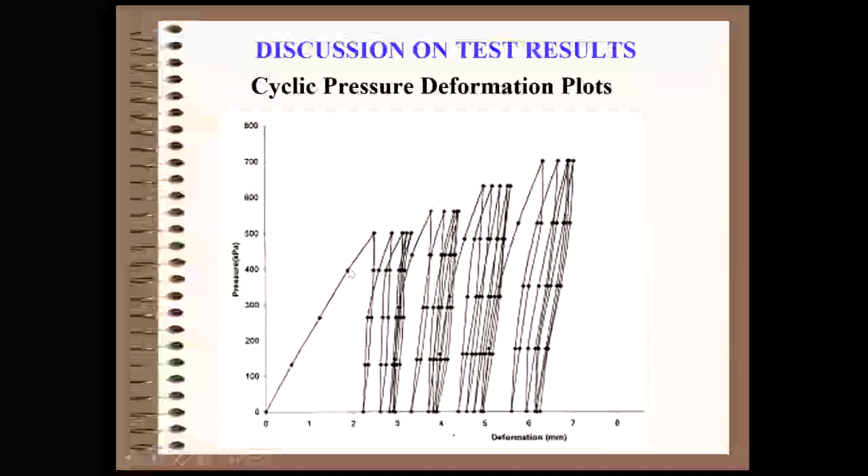The cyclic plate load test, the data presented like this. See how we have done? Only one pressure repeatedly increased until here a loop is formed, no more settlement. Okay, until we reach this no more settlement loop, the testing is continued for every increase in the pressure. Ultimately, from this load settlement patterns, we captured the elastic deformation and also the total deformation. From this, the total deformation versus pressure plots were drawn.

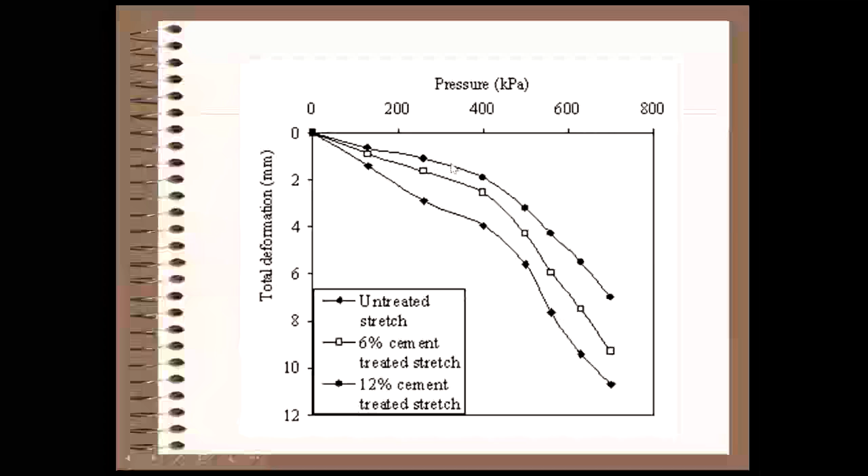Interesting, you see, when cement stabilized, the deformations are very insignificant within one, just like that for these pressures. Then elastic deformation is very important to understand the pavement life. That also significantly reduced when cement stabilized. So this indicates high or increased life of the pavement.

And another very important point, bearing capacity people normally use predominantly in engineering practice, but that understanding we have to be very clear. You see, without stabilization or with stabilization, the bearing capacity is not changed very much, right? Interesting. Settlements are changed. This is important. That means in the case of pavement engineering, whatever that aggregate soil, everything when they are a little dry, bearing capacity wise, everything will be satisfied. But the settlement only a problem, right?

So again, most of the pavements will be subjected to distress when the settlements cross the limiting value. Settlements allowed in the case of roads are very small. In foundation engineering, we allow up to 50 mm, but here it is only 1-2 mm only. More settlements means distress will be there in the pavement. That is why road should enjoy the traffic, not suffer under the traffic. This is the philosophy.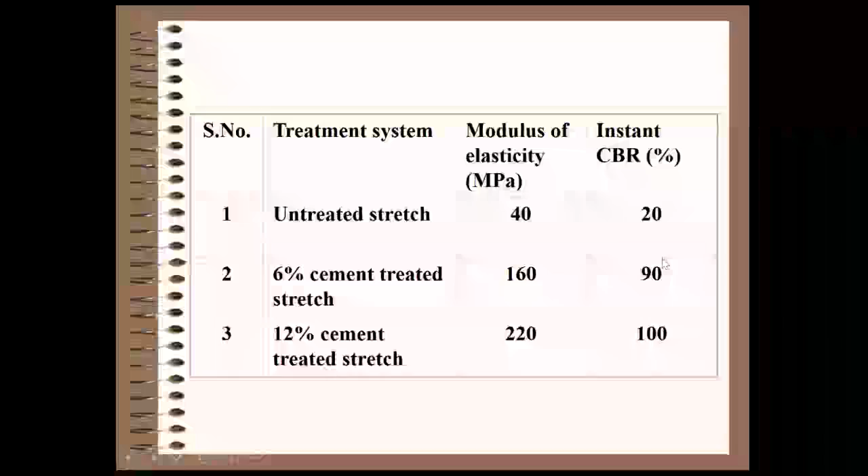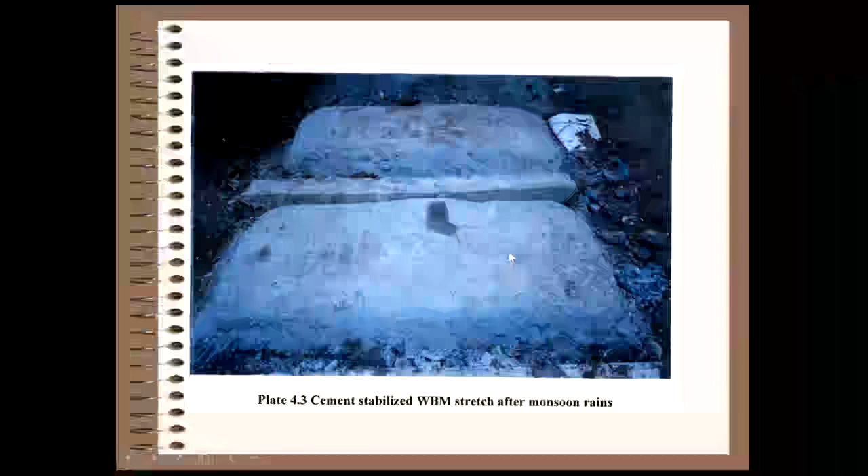Even CBR significantly increased. This is how, even after severe monsoon rains, the 12% cement stabilized stretches are seen like this. See how pakka it is, like a concrete road. So this is what we can promote in future instead of crushing our own hills.

Initially I told you some murrum soils presented a liquid limit up to 62%. We were interested in what is really making this murrum have this much plasticity, and where it is coming from. Out of interest, we carried out a mineralogical study. When XRD was carried out, this murrum was found to have montmorillonite mineral. That is why it is reflecting more plasticity.

This we have understood. In Telangana, for example, where is murrum? Top is black cotton soil followed by murrum. Immediately below the top black cotton soil, some layers of the morams may be contaminated in the long run because of the washing of these minerals from the black cotton soil down to the murrum soil. So different types of morams, as I was just referring, have different degrees of plasticity.

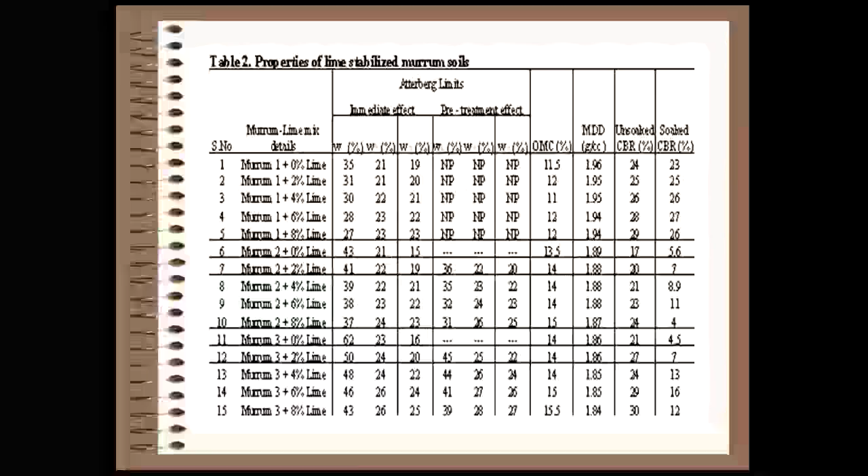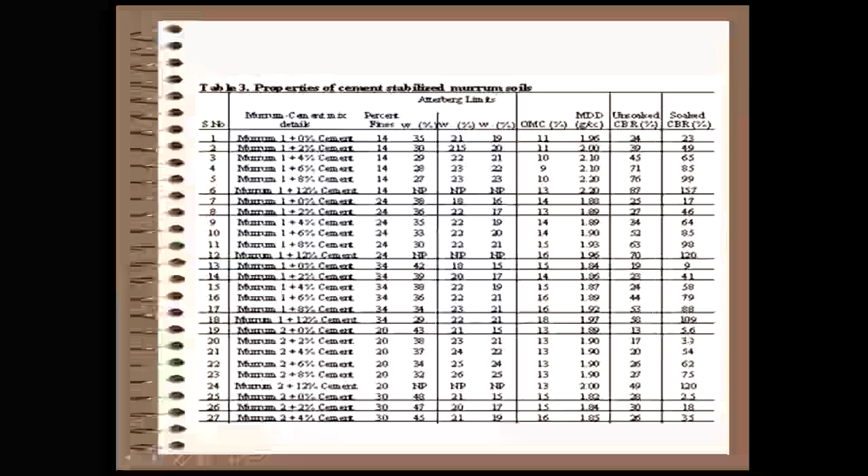We have selected 3 murrum type soils, murrum 1, 2, 3. These murrum soils were stabilized using different lime contents and also cement contents, and all the properties were determined: OMC, MDD, CBR values, everything. We took it as a scientific study of how we can understand the behavior of Telangana morams over a wide range of these stabilizer contents. Here cement also we used for different types of murrum soils, got the OMC, MDD and soaked and unsoaked CBR values.

Just to have an idea, CBR values are not significantly increased by lime stabilization because our murrum soils are not that reactive within that 4-day curing period. That is why CBR was not increased. But with cement, there is a significant increase in the CBR value, with any type of murrum soil.

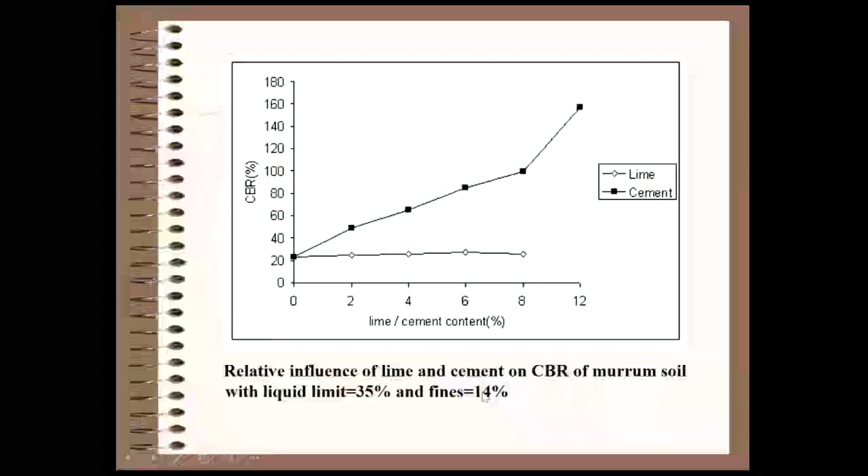One type of murrum soil has liquid limit 35%, fines 14%. Here the liquid limit of the murrum soil is 43%, fines 20%. Here 62% liquid limit and fines 25%. So these are some of the widely available natural murrum soils we studied. But these murrum soils are not responding to lime within that short period of 4 days soaking.

Ultimately, all that data we used to get this type of design chart. This helps a field engineer. For example, your target CBR for a particular pavement is, say, 30, and your soils have percent fines 25 to 30 and liquid limit between 40 to 65. That means it is in band 2. The requirement is 30, come down, then around 3% cement you can try. That means 2, 3, 4% cement contents you can try with that soil, get the CBR, and fix the exact content.

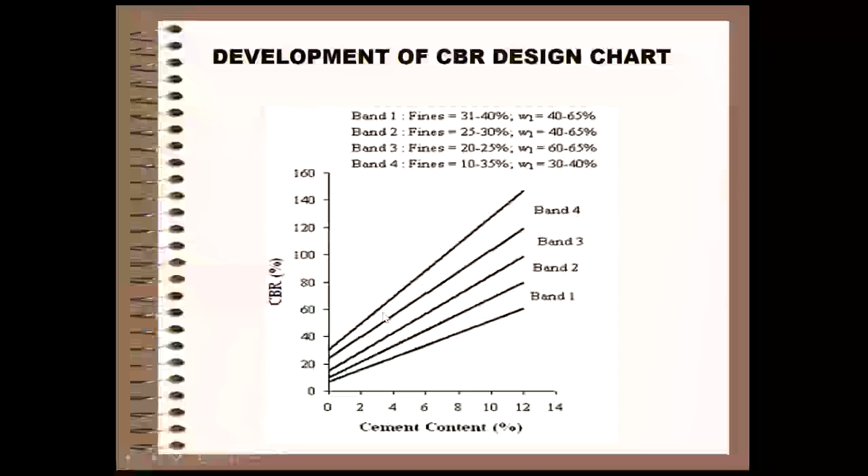Instead of blindly using cement content for our experimentation, we can get a closely related value so that we can reduce our physical labor in the laboratory. That is how this chart will be very useful to select the initial cement content for stabilization.

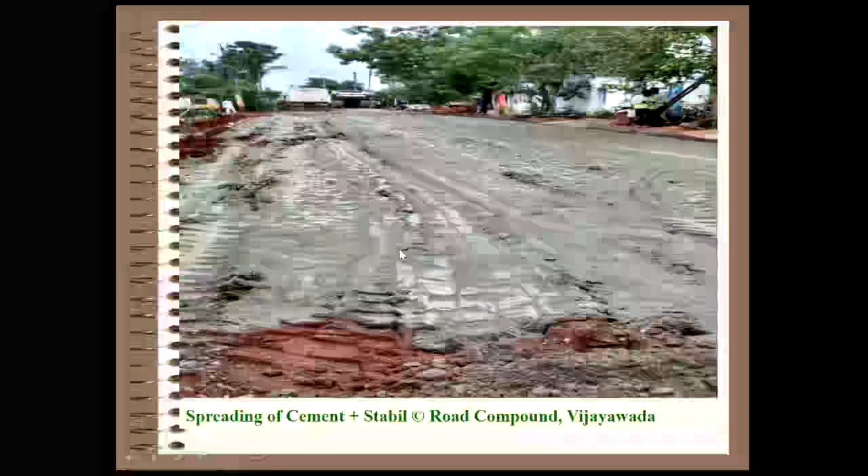And of course, these are some of the advancements in the technology. The Stabil Road concept has been introduced by Germans. Here, one equipment only digs, pulverizes, mixes, compacts, and finishes the whole work. Very interesting, is it not? Smart. But such equipment we have to import to this country in large numbers so that we will be very much benefited by this technology.

One road in Poranki in Vijayawada is constructed using that technology, the Stabil Road concept. Simply, this is only cement stabilization, but they say some product is added additionally to the cement so that they give a 50 years guarantee. This type of equipment somehow we have to get for our Indian conditions so that we will be successful in our stabilization techniques. See, after stabilization, it is looking like concrete. This is only soil, stabilized with cement.

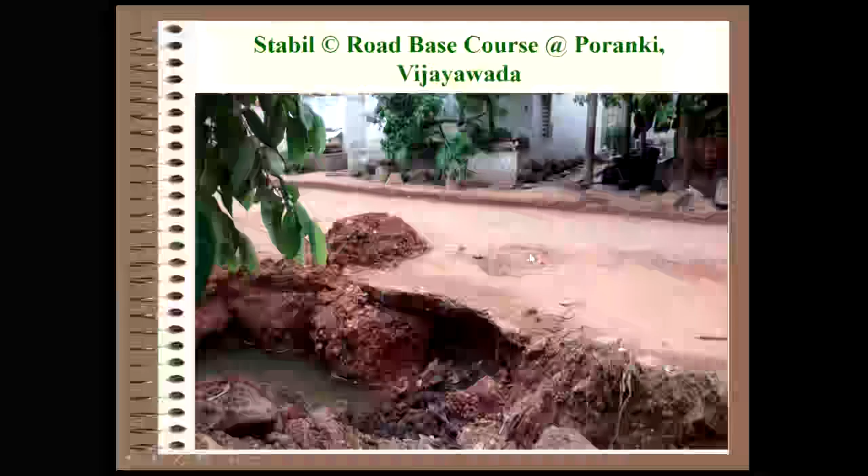But our story in Guntur, for one of the road stretches under the directions of the ministry, we suggested cement stabilization. However, the contractor took up this work and after 2 months, he said he was helpless to get it pulverized as per the code. What I told, 25 mm, 100%. Where is 25 mm? Where is this size? And 80% should pass through 4.75. It is also not that easy.

So ultimately, we could not do anything, and we changed the technique. We asked him once again, level it, go back to the original idea of the CNS layer concept, local available murrum soil. We suggested placing it by 2 feet and over that again completing the road. That is how we suggested it, helplessly, because we could not complete the cement stabilization for want of equipment. Not that cement does not work, but equipment must be there. Otherwise, locally used tractor trolley and harrows do not work to the expected level as per the code.

And on our campus, we studied a little to understand the black cotton soil, because most engineers face problems with black cotton soils. So we also are interested to understand a little so that we have some first-hand knowledge. Why depend only on the books? This small study we carried out on NRIDA campus near the guest house. See what we have done. It is all black cotton soil.

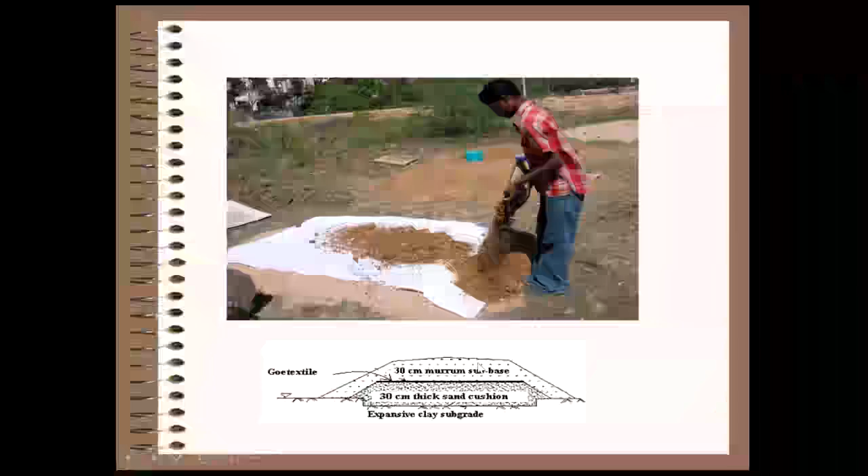You see, this is the fate of these stretches. 30 centimeter sand and 30 centimeter thick murrum cushion. Then you see how it is severely broken. You may ask a question, sir, when you are following the codal standard, still if you feel this, what can we do? Please understand, most of our codal specifications in black cotton soils are against the swelling. But shrinkage is a severe threat. During the drying or desiccation under sun, the soil subgrade will be subjected to tensile stresses in the order of 100 to 150 ton per meter square. It's not small. What is this poor soil? Its tensile strength is insignificant. That is why they will break when desiccation happens in the subgrade.

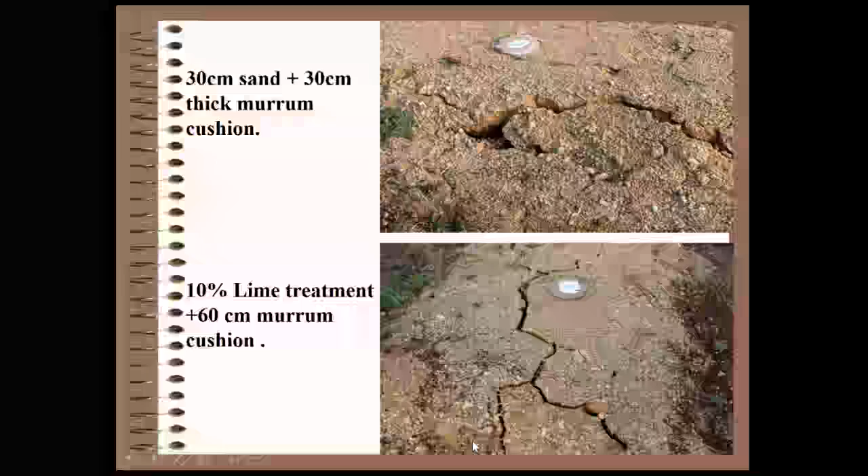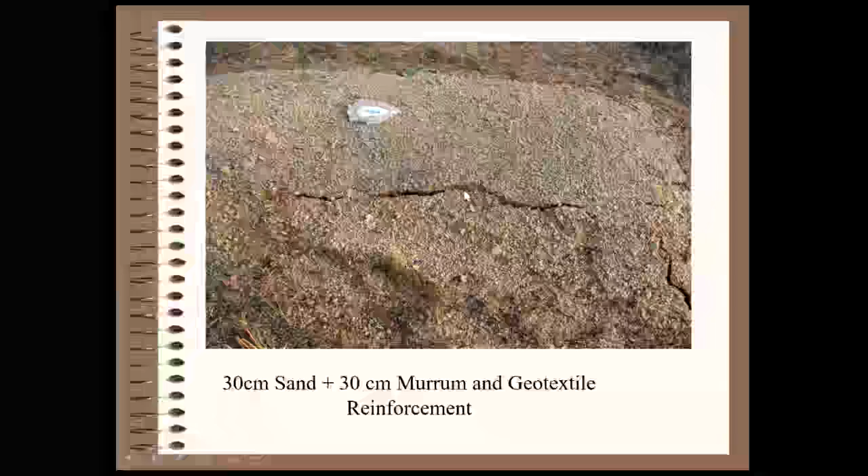Here 10% lime we have mixed with the native soil, recompacted, and then a 60 centimeter thick murrum soil cushion is placed. Even then the system is cracked. Here cement again we have used to stabilize the subgrade, and 60 centimeter thick murrum again placed. Even then it is subjected to cracking. And 30 centimeter thick sand and 30 centimeter thick murrum and geotextile, even when we have used, the system is cracked. You may ask a question, even when geotextile is there, why at all does it have to crack?

Please understand, when sand is placed below, water could quickly enter into the system. Black cotton soil can be silenced when you can succeed to allow water entry slowly. If anything enters quickly, your techniques will fail. That is why slow and steady. That concept is true even with black cotton soils. Somehow we have to manage our drainage systems so that water ultimately enters, but let it enter slowly, by which there is a mechanism actually, cohesive bonds will be developed within the clay to self-stabilize the system, so that it will come to self-stability with little volume change. That is only our success.

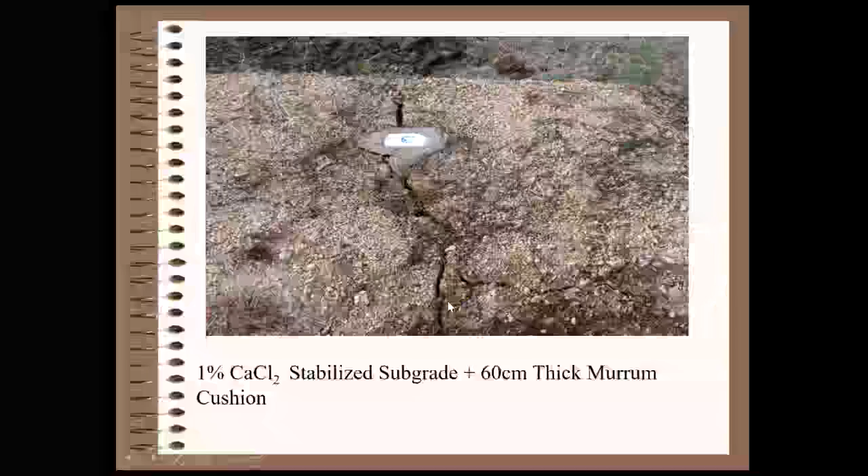And ultimately here, even when 1% calcium chloride stabilized and then murrum cushion is used, that is also cracked. That means whatever it is, calcium chloride, lime, cement, etc., may be good for swelling control, but against shrinkage, they are helpless. See here the magic.